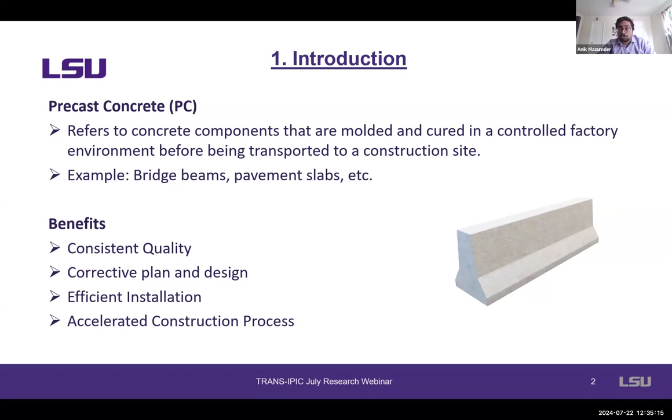They provide consistent quality since they are manufactured in a controlled environment, ensuring uniformity and high standards. Their efficient installation is ensured because precast components can quickly be assembled on site, reducing construction time and accelerating the construction process.

If we take a look at our work in phase one, we aimed to develop a hierarchical framework of significant factors representing the interdependencies or relationships of the precast concrete supply system using interpretive structural modeling. First, we identified the factors associated with cost, reliability, and sustainability. Then we explored the interdependencies among each element, and developed a hierarchical framework which helped us build this CCM, or curing cost minimization, model.

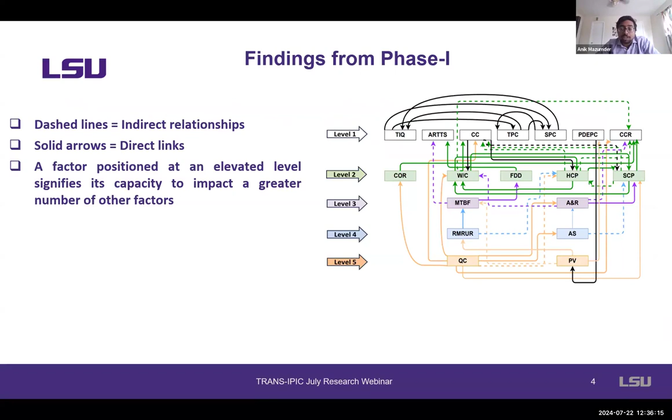This was the hierarchical framework representing the relationships among all the factors related to cost, reliability, and sustainability in the precast concrete manufacturing sector. The dashed lines indicate indirect relationships, while solid arrows indicate direct links between factors. A factor positioned at an elevated level signifies its capacity to impact a greater number of other factors.

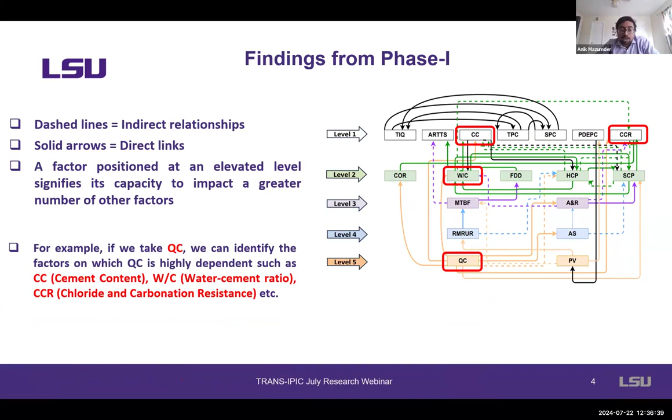For example, if we take QC, quality control, we can identify the factors on which QC is highly dependent, such as CC, cement content; WC, water cement ratio; and CCR, chloride and carbonation resistance, among other factors.

Now, if we talk about the motivation of our research work in this phase 2, we need to know the importance of efficient production of precast concrete.

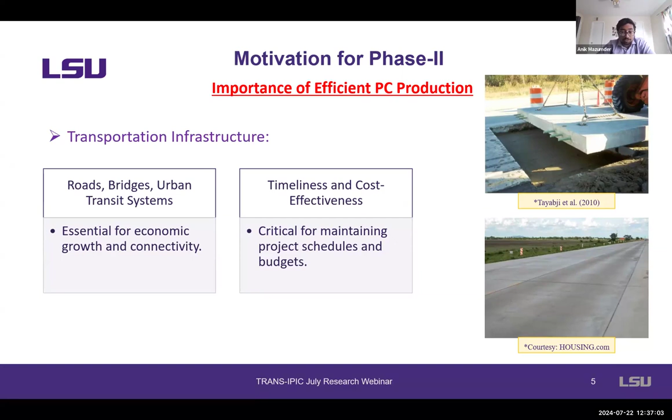If we talk about transportation infrastructure, it is essential for economic growth and connectivity, such as roads, bridges, and urban transit systems. It is also critical for maintaining project schedules and budgets. We can also face production challenges because mold setting and curing processes play a significant role in cost and efficiency, and can be highly energy consumable and create high labor costs.

Several studies have addressed various computational techniques that can address planning issues and aim to reduce the cost and project completion times.

According to Dawood, they proposed a heuristic approach for job scheduling. According to Chan and Hu, they developed a genetic algorithm for flow shop sequencing. According to Prata, they proposed an integer linear programming model aimed to schedule the production of beams and minimize empty spaces in the molds. According to Wang et al., they developed a heuristic approach to solve a suboptimal model to configure pallet layout during operations.

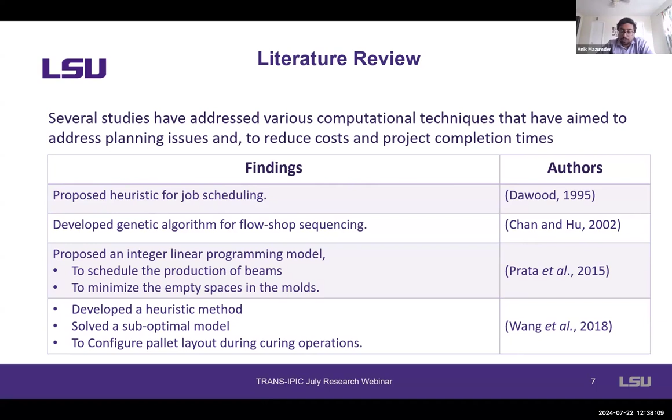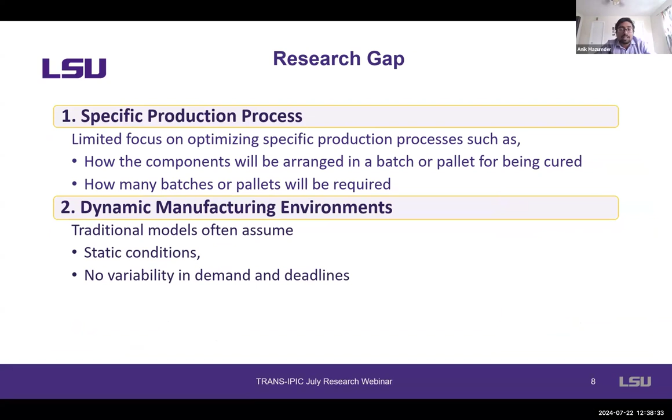So if we try to find the research gap, there is limited focus on specific optimization processes, such as how components will be arranged in a batch or pallet for curing, and how many batches or pallets will be required for the total curing process. Also, traditional models often assume static conditions, assuming there is no variability in demand and deadlines. So what is our existing problem?

In most cases, a single component is placed in a single batch or pallet during the curing chamber, which can cause a high number of batches or cycles to fulfill the total curing operations. This can also cause us to miss delivery deadlines and create extra penalties.

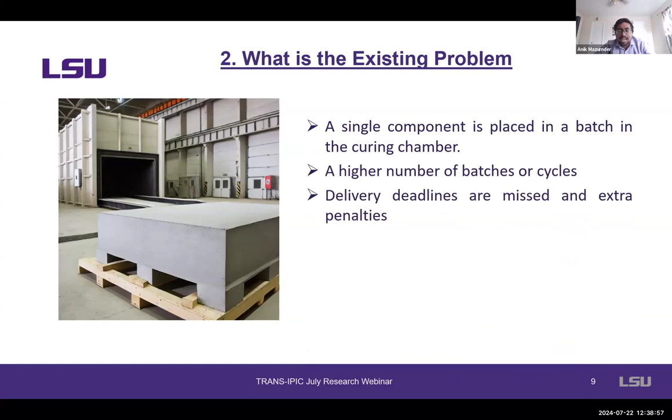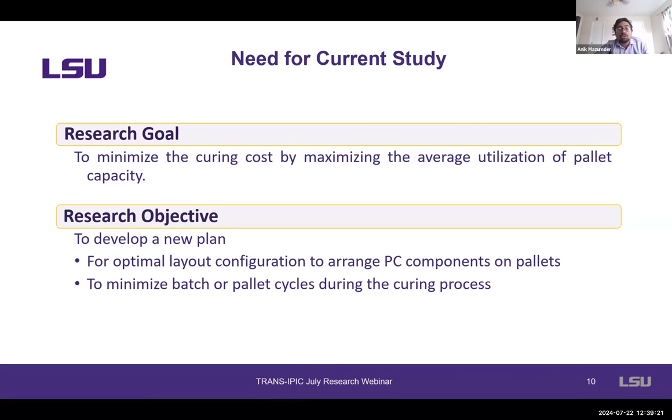So we need an optimal strategy for placement of curing materials or components. Our basic research goal will be to minimize the curing cost by maximizing the average utilization of pallet capacity. Our objective will be to develop a new plan for optimal layout configuration to arrange PC components on pallets, and also to minimize batch or pallet cycles required during the curing process.

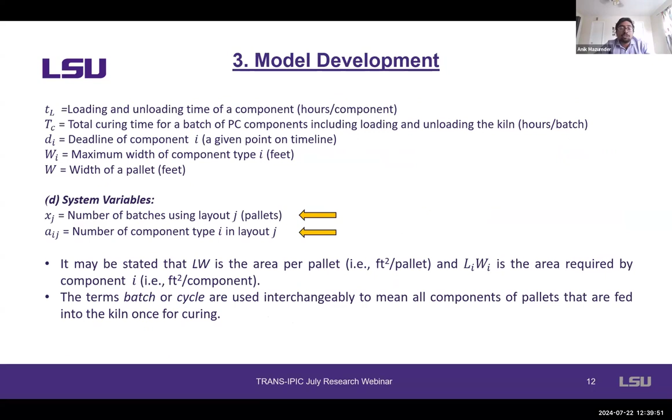For the formulation of the curing cost minimization, in short the CCM model, we will use these indices and system constants. Finally, we'll try to figure out the value of our system variables, or decision variables: xj, the number of batches using a specific layout, and aij, representing the number of components present in that layout configuration.

Using the previous slide's notations, we have developed the total energy cost. We will calculate the total energy cost for the PC components as presented in these equations, and after that we have multiplied that with the total batch numbers.

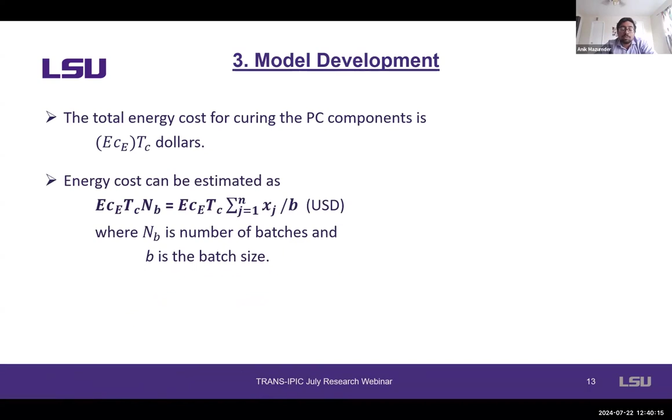We have also calculated the cost of loading and unloading components in all the pallets, and using that we have developed our first objective function in our CCM model using the system variables xj, the optimal number of pallets, and aij, a set of components per pallet, to minimize the cost of curing operations. So the objective function CCM in equation 1 represents the total associated cost of energy cost and

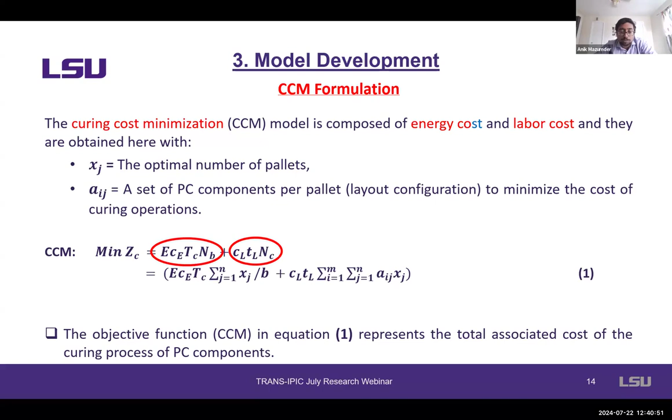labor cost per component, and this equation will be minimized to find the minimum curing cost.

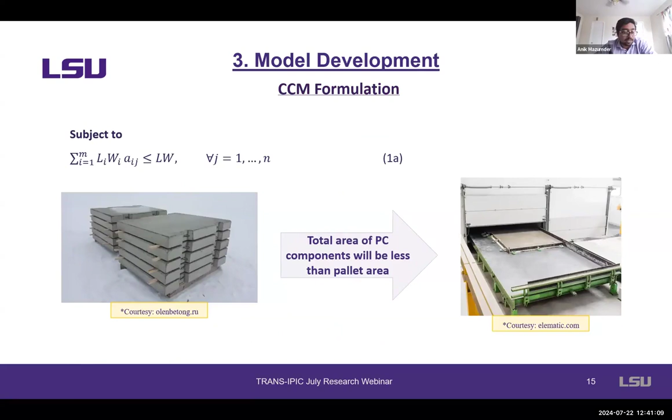This objective function was constrained using some equations. The first equation represents that the total area of precast concrete components will be less than the pallet area. The second constraint represents that the total number of required components of type I must meet the order agreement. The third constraint ensures that the production scheduling complies with the delivery deadlines of precast concrete components.

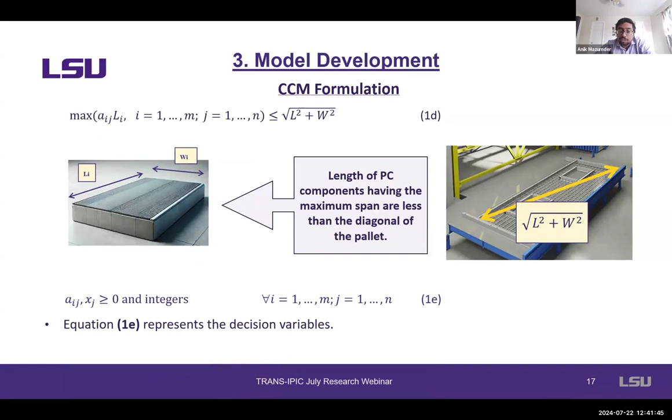The fourth constraint indicates that the length of precast concrete components having the maximum span is less than the diagonal of the pallet or batch present in the curing chamber. Finally, equation 1e represents the decision variables. That is the total package of our CCM model, having the objective function in 1 and other constraints from 1a to 1e.

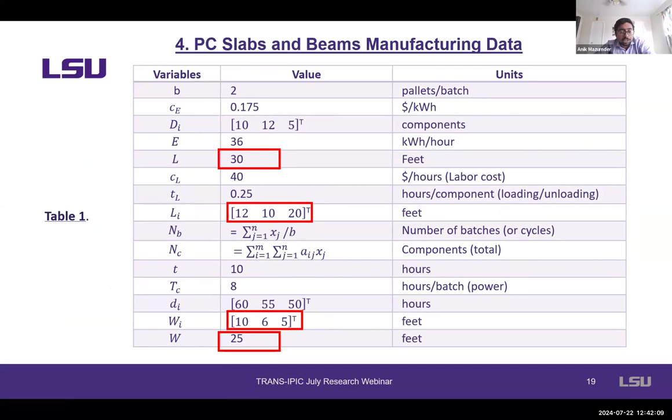After that, we took some example data to verify our model, using various data like the pallet dimensions and the precast concrete component dimensions to verify our CCM model. Using the data in Table 1, the CCM problem was numerically formed as follows.

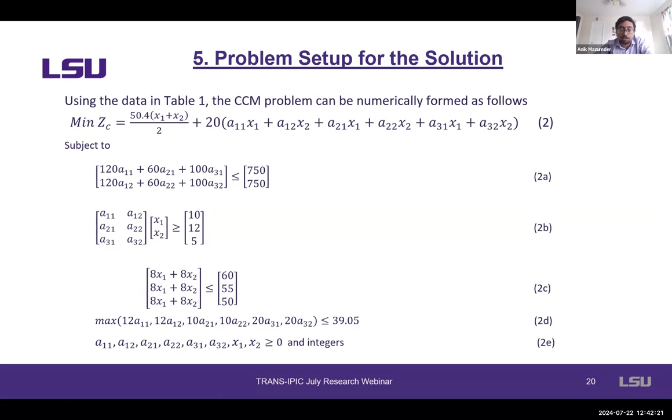Then we found the optimal number of pallets for two types of specific layout configurations. For the first layout configuration, we figured out the x1 value, which is 2. For the second type of layout configuration, we found the x2 value as 3.

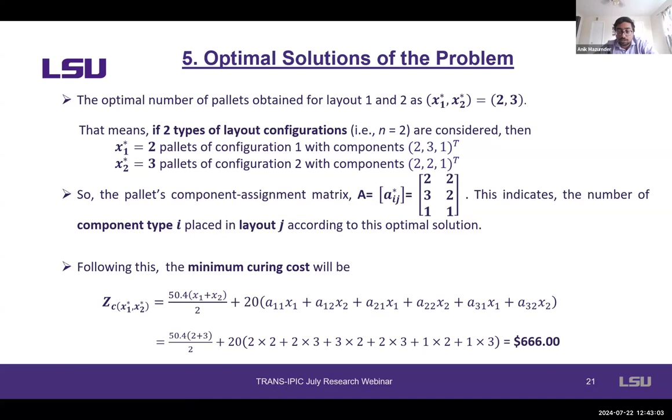So the pallets component assignment matrix A is equal to aij is 2, 3, 1 and 2, 2, 1. This indicates the number of each type of components placed in each type of layout configuration. Following this, we have determined the minimum curing cost, which will be $666 in a batch.

The computation input data and output results are provided in table 2, wherein only the changed values are provided in the input data column, and the rest of the parametric values are chosen from table 1. This table was built to analyze the computational performance of our CCM model.

From the research perspective, the computational performance results were analyzed and we found the following points: when the demand DI per precast concrete component increases, the curing cost also increases, as well as the computational time. When the length and width of the precast concrete components, meaning the dimensions, increase, the curing cost and CPU time also increase, but at a comparatively lower rate.

If more components are assigned on the pallet or batch, fewer pallets or batch cycles are needed, and so the batch sizes lead to lesser cost, according to the third row of our table 2 in our previous slide.

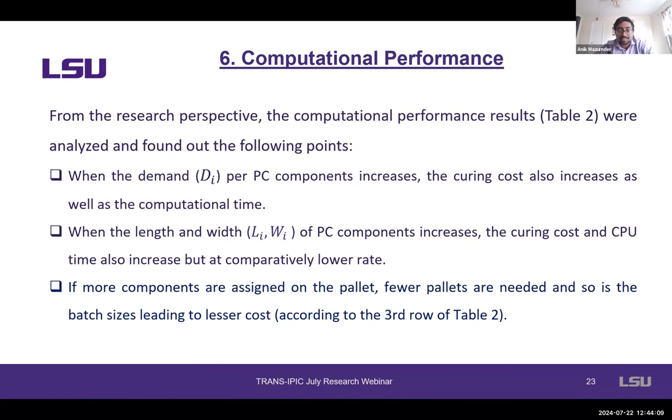In our future work, this mathematical model will be used to incorporate industry data in collaboration with Louisiana's Transportation Research Center. With increasing demand and dimensions of precast components, CPU time also gets increased. So a heuristic approach will also be followed to get the optimal layout configuration to reduce the curing cost. The model will be revised to focus on the most critical variables that can reduce curing cost.

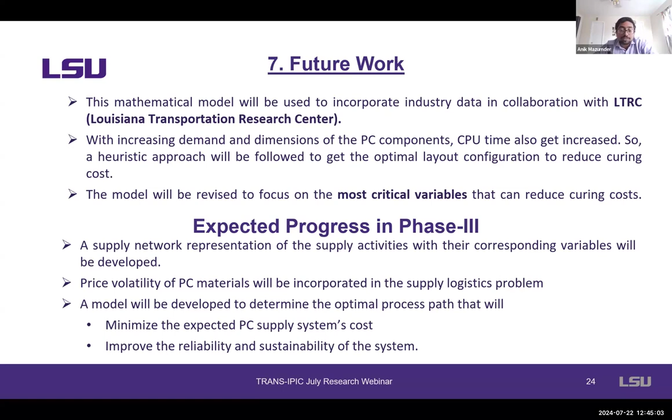As our expected progress in phase 3, a supply network representation of the supply activities with their corresponding variables will be developed. A price volatility of precast concrete materials will be incorporated in the supply logistics problem, and a model will be developed to determine the optimal process path that will minimize the expected precast concrete supply system's cost and improve the reliability and sustainability of the system.

As an application and scope, this optimization ensures that each component is evenly cured, which is vital for consistent material strength and structural integrity. The economic efficiency achieved through the model not only lowers the initial project cost, but also reduces the life cycle expenses associated with maintenance and repairs, supporting long-term sustainability.

These are our two working papers that we are working on. The first paper was to develop an interpretive structural modeling on factors, and that was the outcome of our quarterly progress report 1. Now we are working on optimizing the pallet capacity utilization to minimize the curing cost, based on the outcome of quarterly progress report 2.

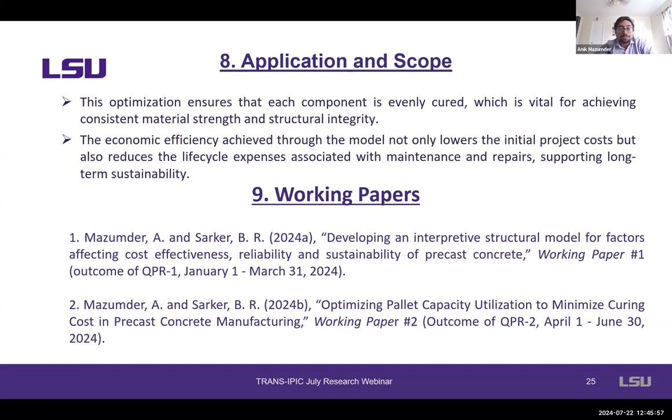Any question? I have a question. Okay, yeah.

Go ahead. So, Anik, thank you very much for very comprehensive, nicely presented work. My name is Jan Olek, I'm from Purdue University, and I got a question related to the statement that the curing cost increases with the demand. Could you elaborate a little bit more why that would be the case? Because from the concrete point of view, there's optimal curing conditions, and it should be independent of the demand, right?

I mean, there's not much you can do in order to accelerate if you're already accelerating. So maybe I'm missing something there. If you could elaborate, that would be good.

This statement? Yes. Okay, so basically this DI represents the demand for a specific type of component indicated at i. So when the demands will be higher, like if you're dealing with two types of precast concrete components, one could be slabs and one could be beams. When the demand of slab is 40 and the beam is 30, there will be a specific kind of curing cost. But when your demand is higher, instead of 40 if it's 60, then you will have to pay for the curing cost, because you have your pallet cycle, or you will need a higher number of batches to cure your concrete, because pallet size is constant.

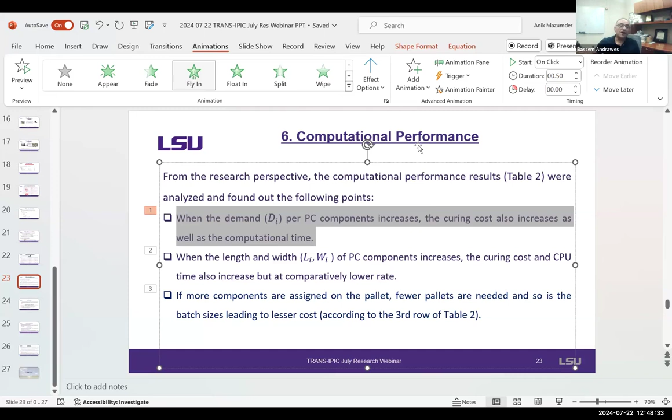I think I might have a question. Thank you, Anik, so much for the very nice presentation. You mentioned some dollar amounts, which brings the curiosity of someone from industry to ask where you obtained your main cost figures.

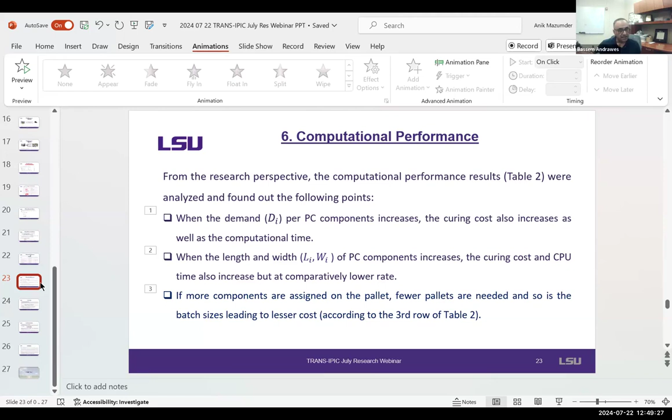You mentioned energy and labor as two main sources of cost. When we say energy, do we know if the energy consumed by different precasters for the same type of component is the same? Are you taking this variability into account? Another important thing is the mix itself - concrete is just one thing, but what goes into it and the curing process matters, since different precasters adapt different practices in curing. Can you elaborate on the variabilities and how they are included in your study?

Okay, let me get back to the slide. You're talking about these two types of equations, right? So in that equation, it's actually indicating the energy cost. Here, let me go back to the notations - E is calculated as the energy consumption rate per curing chamber, in kilowatts per hour, and CE is the unit cost of the energy.

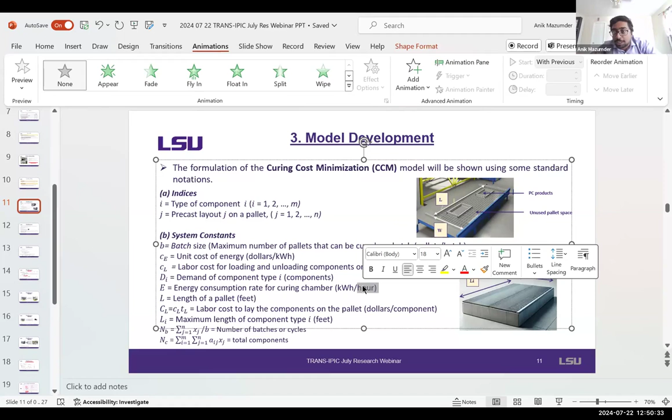You've pointed out a very good point, because every precaster can use their curing chamber differently - different energy rates and unit costs of energy will vary from place to place. That's based on how many hours you use the curing chamber for different types of precast concrete components. The same goes for labor cost, which is calculated per component - when placing components in pallets or batches in the curing chamber, the number can differ, so you pay a different value for each component.

In this case, Anik was basically measuring the power or energy consumed by the whole system, not by individual components, because the layout would be arranged differently. He took the combination, but the time span for all products remains the same, because the kiln chamber time is given on a batch basis, not an individual component basis. How much time and energy is consumed is measured per batch, not per component.

Am I clear? How would the material - the mix itself of the concrete, and for example the type of cement used and other factors - how does this play a role there, if any?

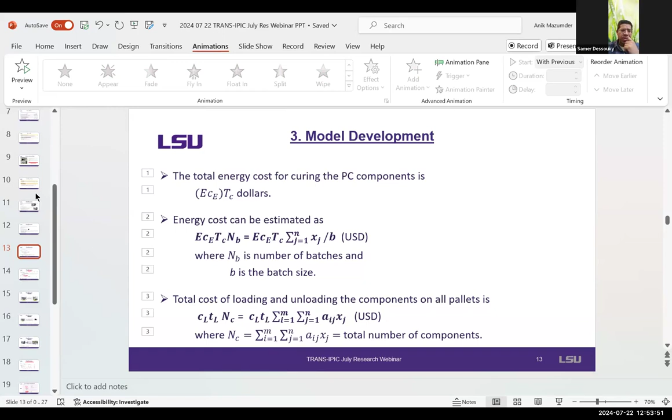Go ahead, any other question? Yeah, just a follow-up question - does the framework you presented have manufacturing data? Because every manufacturer is different - production rates, the type of frames, type of forms they use, the environment they have. So does your framework have manufacturing dependent data that I can account for?

This framework was developed based on expert opinions and existing literature, because it represents how each factor relates to another. For example, if you want to increase the quality of your concrete, quality itself is a vague term - it's dependent on other terms. So you have to look at what factors improve quality. If you look at quality, you have to look at your cement, concrete, or W/C ratio, or CCR, and so many other factors. So we've basically figured out these types of relations.

But yes, we will try to figure out some numerical values and assign these values with something, because there is an issue with reliability. We still don't know if we improve the W/C by 90%, what will be the quality improvement ratio. So we'll try to figure out this data from the industries, and then implement them in this framework. Thank you for that.

That was a very good point. Thank you, Samer, I think your point will be more elaborated. This data does not represent any particular company - it is just representative data, but it will vary from company to company, from film design or chamber design perspective. So we cannot say this is generalized data for all chambers. I understand, but at least the model has a piece that can account for variabilities between manufacturers. Yes, that's the important part. Thank you.

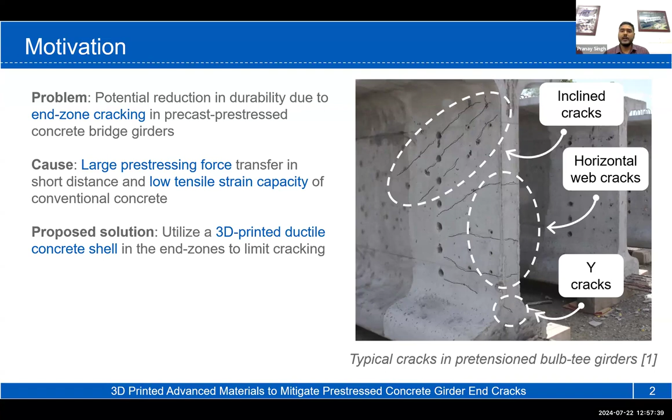So the cracks that are exposed to the environment - we are trying to reduce the width of those cracks at the end zones. Considering our problem statement, our objectives are to investigate the SHCC shells and how they can be implemented to solve this problem, to develop a 3D printable strain hardening cementitious composite mix and a printing system for material level testing, and to look into the composite behavior of the SHCC and conventional concrete, how they behave when cast or formed together.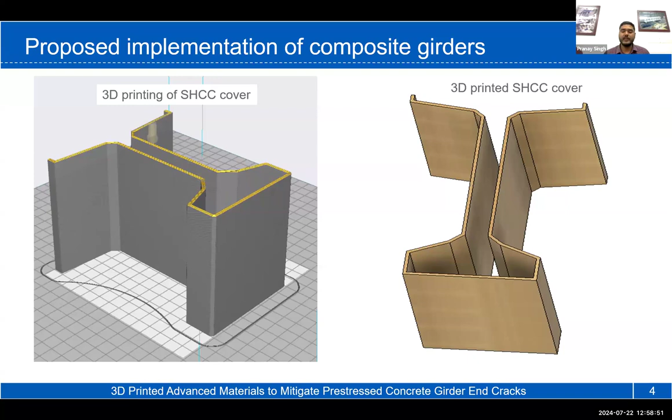As the technology matures, it could have many different use cases and implementations, but at this stage we're considering one simple method with two different stages. The first stage involves 3D printing of these covers - a 3D printed SHCC cover will be made either at the precaster's facility or at a 3D printing laboratory. Once printed, it will be cured and given time to gain strength. When ready, it will be transported to the precaster's facility, where they have a pre-stressing bed and usual formworks used to create these precast girders.

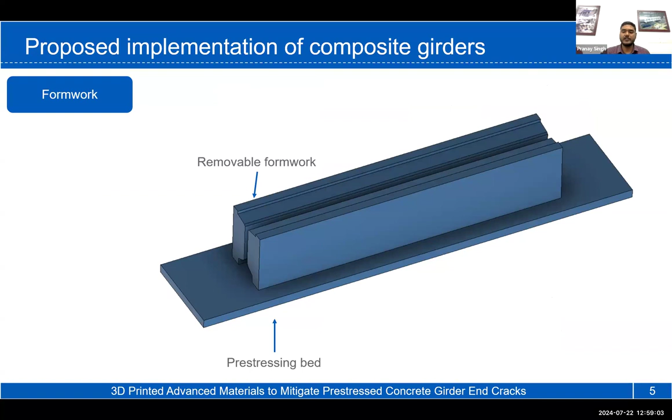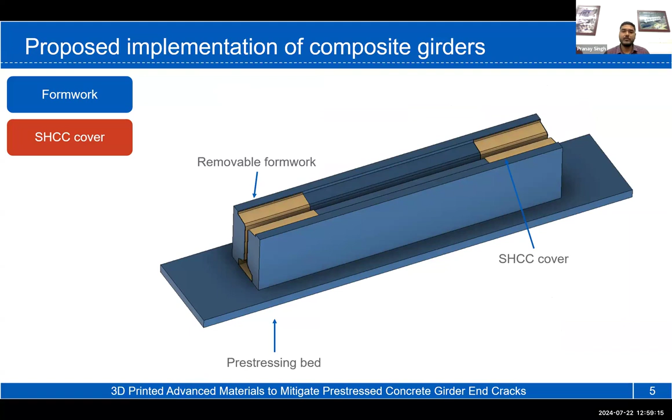One feature of these 3D printed cells is that their thickness will be limited to the cover zone thickness of these girders, so it fits inside the formwork without modification. Then, as usual, non-pre-stressed reinforcement can be placed, pre-stressing strands applied along with the pre-stressing, and then concrete poured. Once it attains strength, the pre-stress can be released and formworks removed. What we get is a composite bridge girder with SHCC covers at the ends. This is one of the proposed implementation methodologies we are exploring.

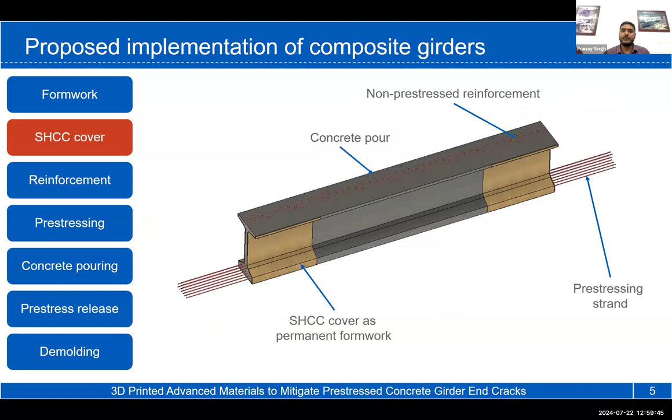Coming to the strain hardening cementitious composite - the material we're proposing for the application is a kind of fiber reinforced concrete, optimized to have distributed cracking instead of larger cracks. The constituents are basically the same as any fiber reinforced concrete, with two key ingredients: viscosity modifying admixture and high range water reducing admixture. The ratio and amount of these ingredients will be calibrated to achieve 3D printability in strain hardening cementitious composites.

So coming to the requirements for the mix that we are trying to develop, it will basically have two different sets of requirements. The first one will be the rheological requirement to make it possible to 3D print this kind of concrete, and the second one will be the mechanical requirement to actually fulfill the objectives that we have with these kind of cells.

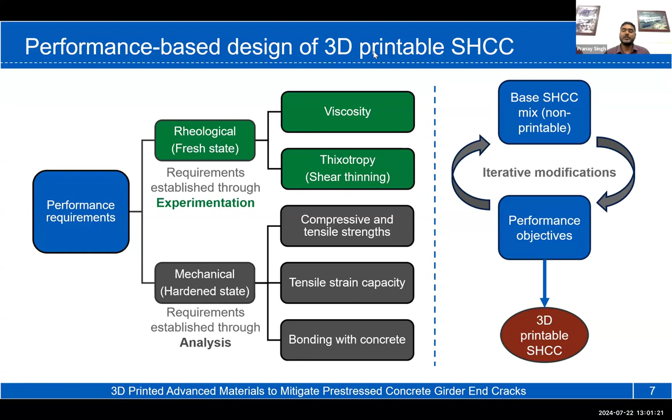So the mechanical properties, one of the crucial ones is the tensile strain capacity for a strain hardening cementitious composite. How we are trying to achieve both these objectives is through iterative modification. We started with a base strain hardening cementitious composite mix that is of course non-printable. It was developed earlier in our lab, and it has that strain hardening behavior. We are modifying its ingredients and changing the proportion in a way that the strain hardening behavior is retained, and it additionally achieves that rheological behavior to make it possible to 3D print.

For understanding the hardened property objectives that we will need, particularly the strain hardening capacity of these materials from these kinds of mixes, we developed a numerical model. This is a 3-dimensional nonlinear finite element model, and we actually modeled a girder which was experimentally tested at University of Texas, and they got very wide cracks.

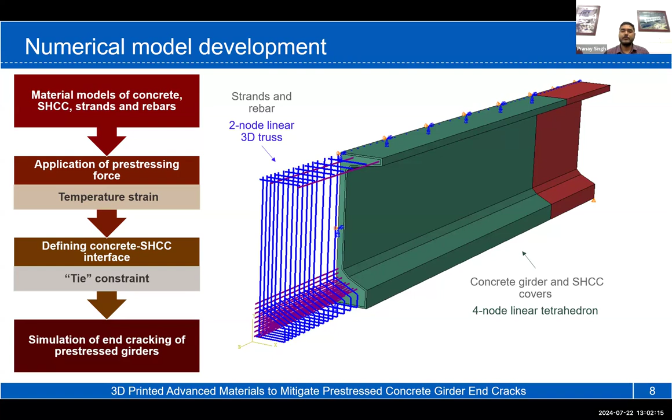They had significant cracks at the end, and that's why it represents one of the worst cases of end zone cracking. So we modeled the same girder with the conventional concrete, and then modified it with SHCC at the ends.

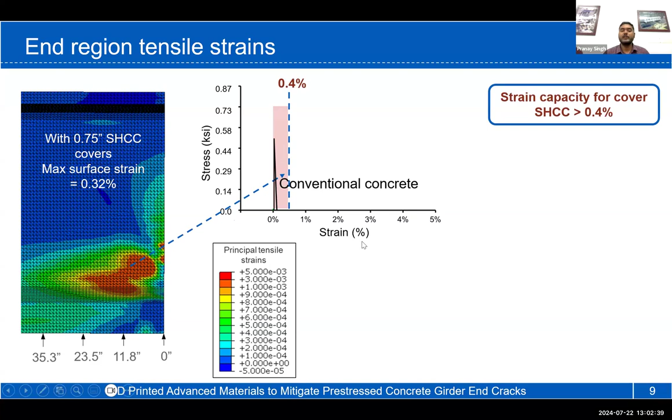When we did the numerical simulation, we obtained that the maximum strain reached on the cover surface is somewhere at 0.32%. This marks the limit for the strain capacity that we will want to have with our covers. As we can see in the stress strain plot, a conventional concrete will actually get significant cracks at this strain level. However, the strain hardening cementitious composites have the ability to sustain this kind of strain, and the average crack width, even at this strain level, will be somewhere less than 0.1 millimeter.

The rheological requirements were established through a series of experimental investigations, and we observed that for strain hardening cementitious composites, they have different rheological requirements which are contrasting from each other for each stage of processing. We start with the mixing, and at that stage, fiber dispersion is crucial for achieving the strain hardening behavior. Then at pumping through our extruder and pumping through the tube, it has a different rheological requirement. And later on, for extrusion and buildability, we have some different viscosity and rheological requirements.

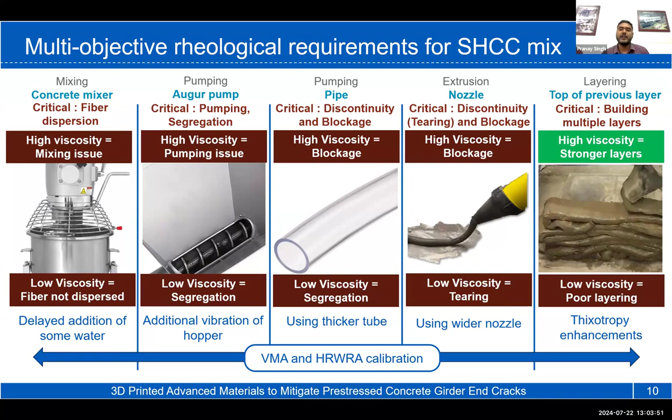So how we achieved it was through calibrating the two ingredients, VMA and HRWRA, and later adding some more ingredients that I will discuss in upcoming slides. So the first stage was viscosity modification. From the base mix, we created 16 different mixes with different VMA to HRWRA content.

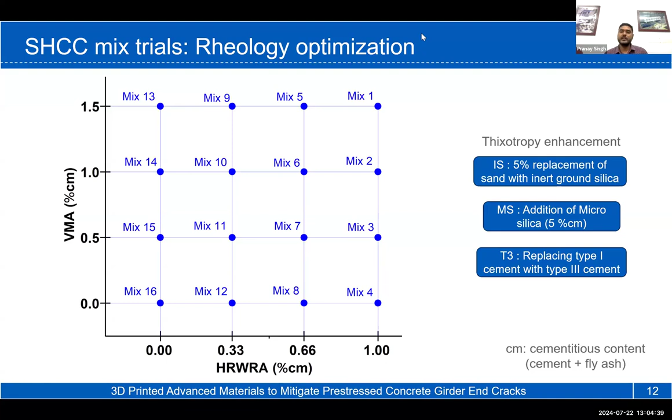Out of these 16 mixes, we tested them, and we disqualified the mixes that were not showing printability, or had water segregation or poor fiber dispersion. We have discussed it in detail in our previous April workshop, and I will not spend much time on that. Once we filtered out the mixes that were not printable out of these 16 mixes, the selected mixes were further optimized for their thixotropic enhancement by addition of ingredients like ground silica, microsilica, and type 3 cement.

So eventually, after this rheological optimization, we obtained 3 mixes that were printable, and they had fibers in them. They started from our base SHCC mix.

So now we tested these 3 selected mixes for their hardened properties. The mixes were mix 9 with inert silica, mix 9 with microsilica, and mix 10 without any additional ingredients. We tested it at 28 days of ambient curing.

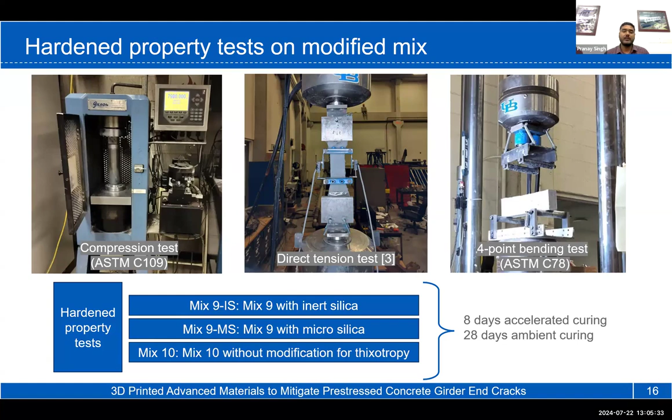So these are the results. I would like to discuss the accelerated curing as well. Accelerated curing is actually an elevated temperature curing, where we elevate the temperature for about 5 days, and for the rest of the time it is in ambient curing. So it takes a total of 8 days.

It is still in study, and we have not completely tested all the properties and compared that it is good, but we are working on that aspect as well.

The compressive strength result shows that for all of the mixes we are trying, we are getting a compressive strength in the range of around 7 to 8 KSI, and our initial target was 6 KSI for all these mixes. So we are getting the desirable compressive strength for all 3 mixes.

The tensile strength of these mixes is somewhere in the range of 0.7 to 0.9 KSI. And the tensile strain capacity was higher than the limit of 0.4%. So we are getting somewhere in the range of 0.6 to 0.9% on average.

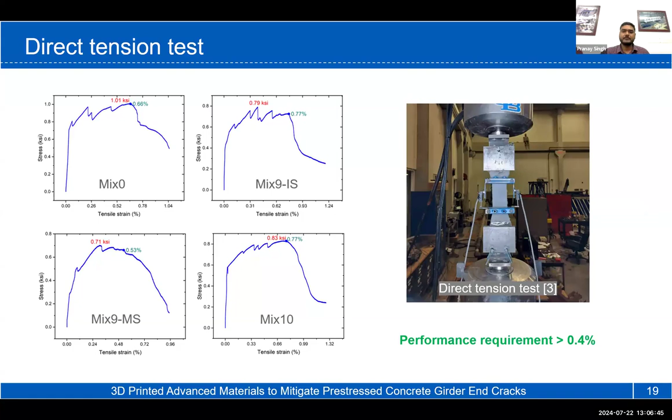We have done a 4-point bend test, and the modulus of rupture from that 4-point bend test is in the range of 1.5 KSI for all 3 mixes.

In summary, if we conclude the hardened property testing and the flow criteria that we wanted to fulfill from the mix, all 3 mixes have an average flowability factor calculated from the drop table test we discussed in the previous workshop. It was in the range of 1.2 to 1.5, and that limit is actually what we found to be suitable for 3D printing purposes.

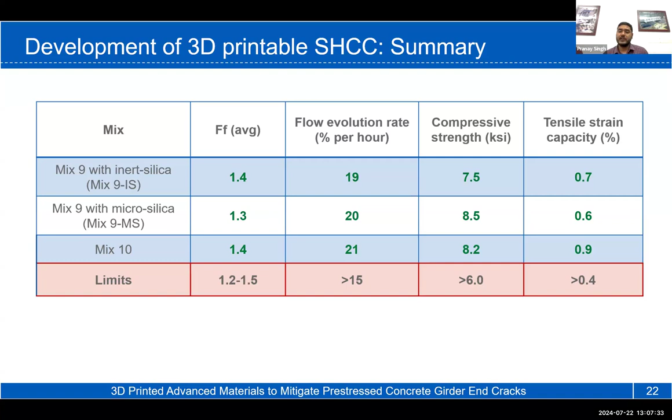The flow evolution rate should be greater than 15%, and our mixes fulfilled that criteria as well. The compressive strength criteria and tensile strength criteria are also fulfilled from all 3 mixes.

Next, I would like to discuss the development of the 3D concrete printer at UB. 3D concrete printing has an aspect of machine material interaction, so the behavior of the material depends on the type of equipment and the setup we have. For that reason, we have developed our own concrete extrusion system, control system, and a computer numerically controlled frame.

This computer numerically controlled frame is actually a pre-built frame for printing plastic, but we have modified it to work with concrete. The control system we are using is an Octopus board with Marlin firmware.

We input the G-code files for the 3D model through Pronterface, which is an open source software. Our control board controls the nozzle X, Y, and Z coordinates, and it has the capability to control the feed rate from the concrete extruder.

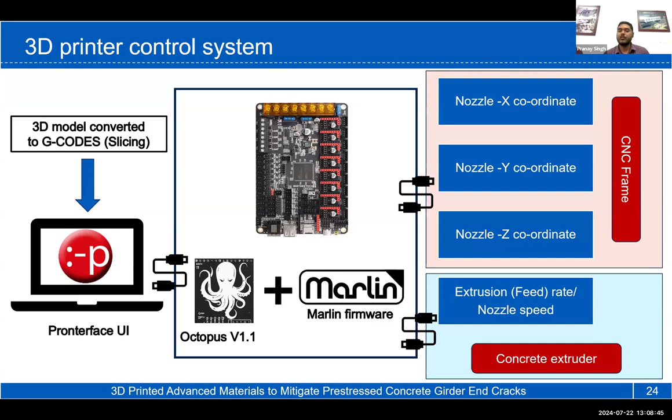We have not yet done that. We are working with a constant feed rate pump, but later on we would include these capabilities as well.

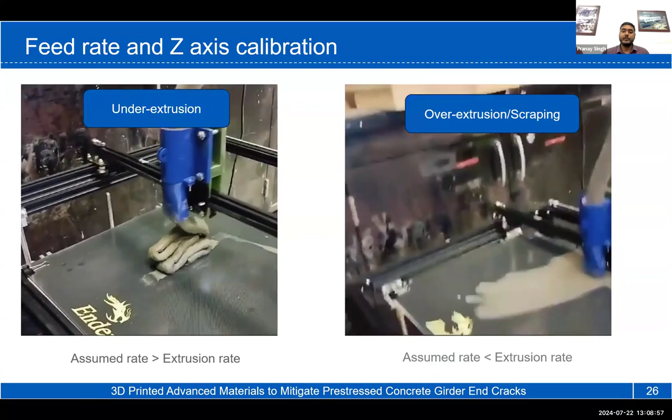One of the findings from the initial 3D printing trial is that the mix we developed requires some initial calibration for the feed rate, that is the speed of the nozzle and the motion of the Z direction. What you see here on the left is under-extrusion, where we assumed our extrusion rate to be higher than the actual extrusion rate. On the right, you can see over-extrusion, where our assumed rate is less than the extrusion rate, causing some kind of scraping.

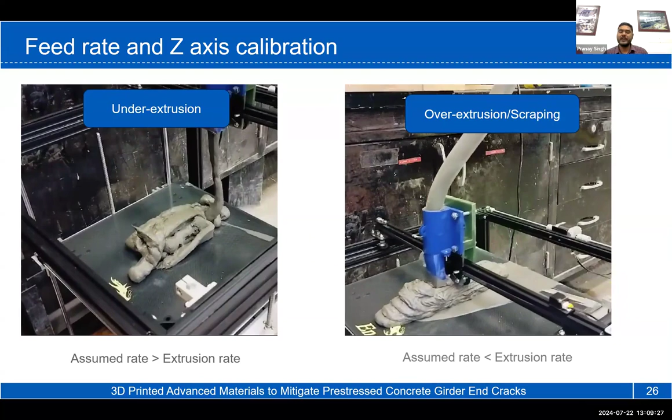Once we optimize this for a particular mix, what we get is this kind of 3D printing, which is good in itself.

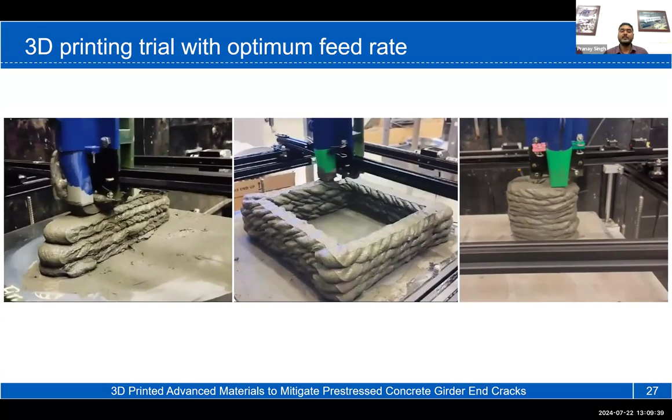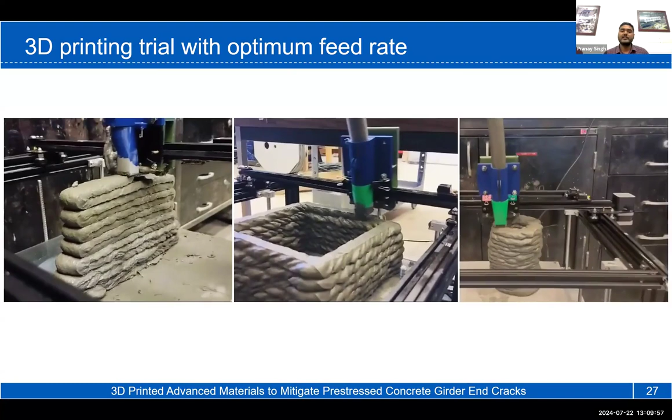Here you can see that our focus is on printing the cellular structures with either 1 or 2 filament thickness. Although we can print solid parts as well, since our study is based on printing of the cellular structures or cells, our focus is on printing these cells and testing their properties.

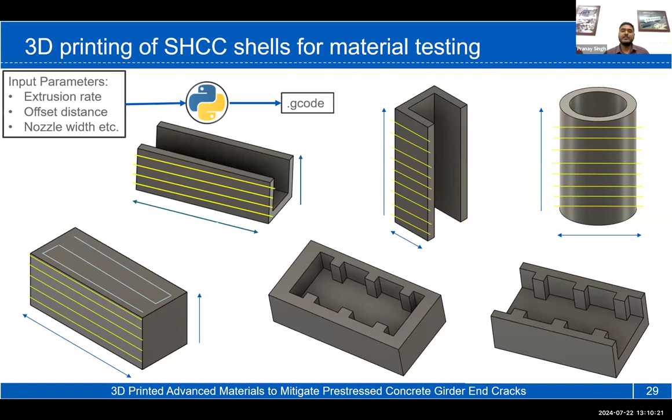What we're currently working on is printing different kinds of cells and looking at the 3D printing as well as their hardened properties. We are also looking at printing some complexes like grouped cells to improve the behavior or the bonding between the concrete and these cells. This all constitutes our future scope of work, but this is the direction in which we are moving for 3D printing.

In summary, we established the performance requirement in terms of tensile strain capacity for our strain hardening cementitious composites, and it was found to be greater than 0.4%. We did some experimental investigation to come up with rheological requirements using the drop table test, and we obtained the flowability factor suitable to be around 1.2 to 1.5, and flow reduction to be greater than 15% per hour.

We performed hardened property tests as well and found that the mixes were complying with the requirements. We further developed a 3D concrete printer with an extrusion system, CNC frame, and a control system.

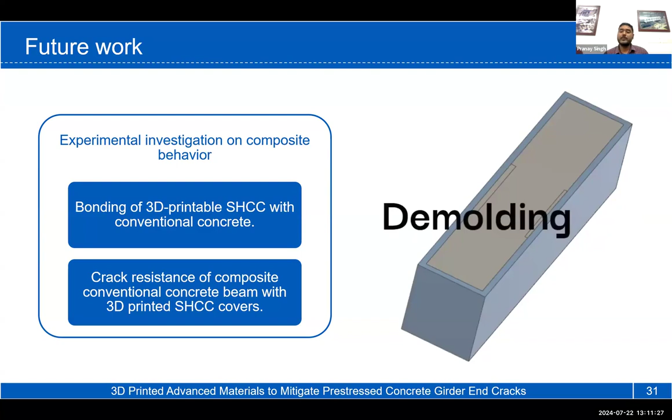For future work, we are trying to investigate the bonding of the 3D printable SHCC with conventional concrete and crack resistance of the composite conventional concrete beam with a 3D printed SHCC cover. So what we are trying to do is test this idea of using SHCC, 3D printed SHCC, as a permanent formwork in a beam.

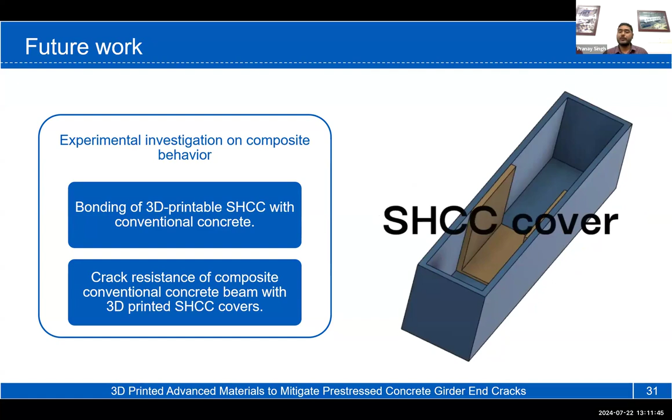So what we will do is take a usual formwork and put SHCC inside it, put the reinforcement, and then create some kind of composite beam to test the hypothesis that we wanted to propose later on for a real full-scale girder.

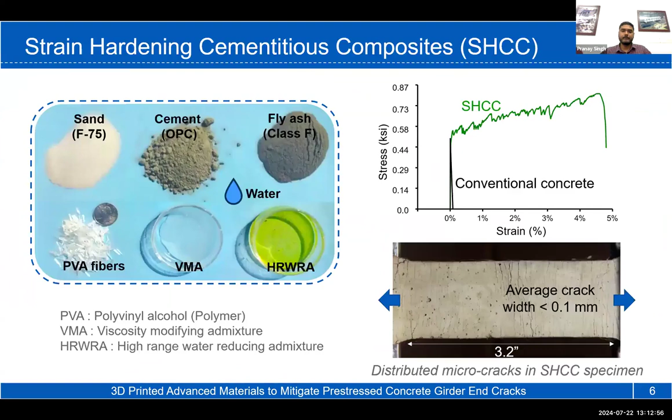Any questions for Pranay? Yeah, I can start with a question.

Great work, Pranay. This is the second time I've listened to this presentation, and it brings up a question. You are introducing a shell made from 3D printing concrete at the girder ends to prevent or brace that portion from the cracks that propagate from the huge transfer loads from the girder to the columns. Correct? So you are bracing that side of the girder, correct? Yes.

Should this problem be solved through revising the concrete mix design to account for these additional stresses across the whole girder, or should it be addressed by expanding the size of the end girders to a larger size? So instead of adding braces, maybe try to resolve it through a stronger mix design, a better cement for the concrete, or expanding the size structurally. So material or structurally - would that also be an option that can be considered?

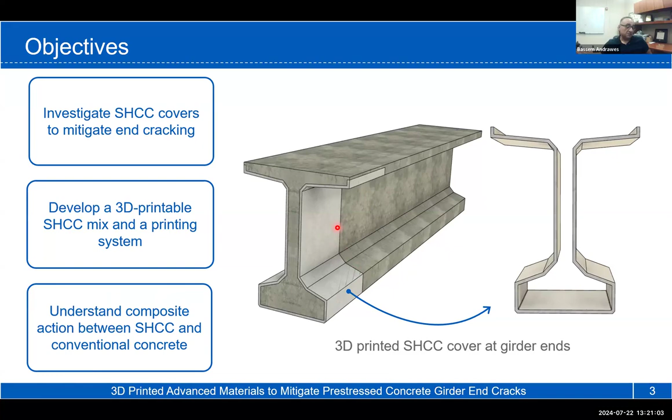What I meant specifically is that the interface when your end region ends, and now you start actually placing your normal concrete, not the interface between the concrete and the 3D-printed concrete at the end region, but the interface between the end region and the non-end region phase. That's going to be the critical part, the line shown in your section. So that's something that maybe needs attention. That's an interesting thing. I don't know how you can handle a problem like that, with reinforcement, with what type of material, transitioning from non-printed to printed.

That's an exciting thing. Yeah, so when we conduct a 4-point bend test with this reinforced beam, we will get answers to some of these problems that may arise. Sure, looking forward to that. Thank you.

I have a few minutes. If there are any more questions, I can entertain them. I think we don't have anybody.

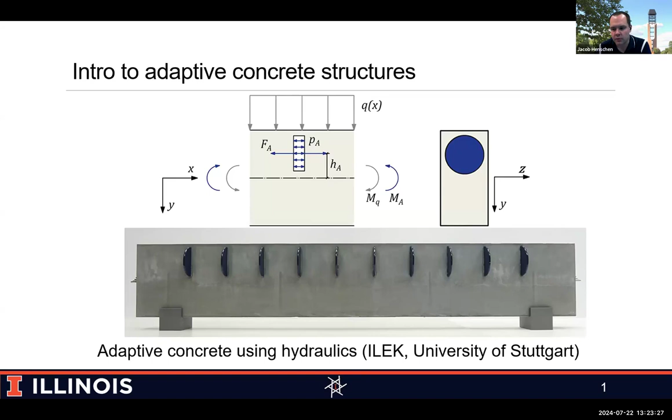developing something for a bridge girder or something that has to be maintained longer term. So as we started to think about this challenge, we wanted to work through the problem. If we have a beam, whether it's pre-stressed or not, any type of precast beam, once we remove the pre-stressing, remove the formwork, etc., that just sets our camber, that sets our geometry. This is limiting when we talk about things like creep in our pre-stressed beams, what happens when loads begin to change, all these other challenges that may arise during the life of a structure. We aren't really able to adapt concrete to that very well.

So borrowing from this idea with the active hydraulic actuators, what if we think about using some type of anchor? There are a lot of expansive concrete anchor systems out there that will generate these internal compressive forces in that top layer that can actually start to adjust our camber.

These anchors could be something where they are load activated. So you think about a load passing over a bridge, all of a sudden the bridge is actively cambering itself, or it's something that would be some type of post-installed system. But basically what we're getting at is we will have our beam deflect, and then we can use some type of system to cancel out the deflections.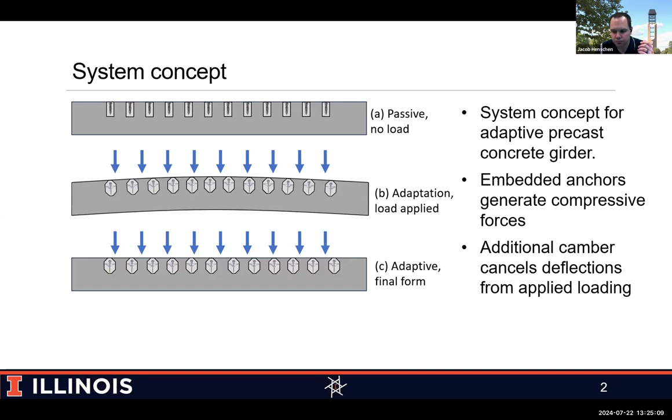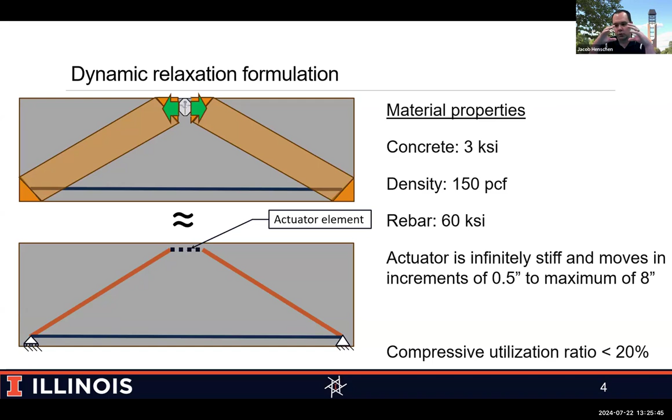Previously, we've presented on the modeling that goes into this, which follows this dynamic relaxation formulation. Starting with the strut and tie model, this is a static analysis where we solve for nodal displacements, element forces, all the usuals. But instead of just having that system that doesn't move, we add in this actuator element that has infinite stiffness, and then it's also able to move and change the geometry.

With this algorithm, it's been around for quite a while, but we've added this folding and bending energy element where at the nodes, instead of having free rotation, there are rotational springs to add some stiffness as we get rotation through our structure. So with the modeling in place, we set out to work on what systems could actually generate this mechanical expansion along the top that would impact camber.

We started with just typical concrete anchors. These are steel sleeves around a bolt with a wedge on the end of it, so as you tighten it, that sleeve expands and bears into the surrounding concrete. They can take a couple different forms. On the left, it expands at the bottom. The ones on the right expand through the center.

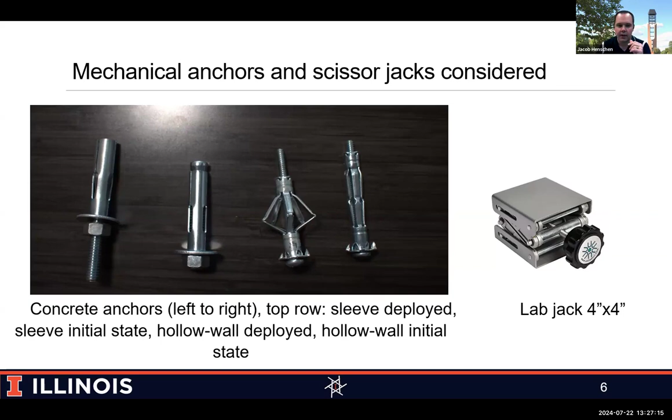We also thought, well, let's maybe work on a more idealized system too. So we actually just employed a lab jack where we can control exactly the displacement at the top.

It's actually pretty challenging to measure what the force is in these different anchoring systems. With the lab jack, I'll talk about how we calibrated that in a few slides. But with a lot of those anchors, we had to get creative. So we were working with some scales and some jigs to understand, as you start to actuate these anchors, what is that expansive force?

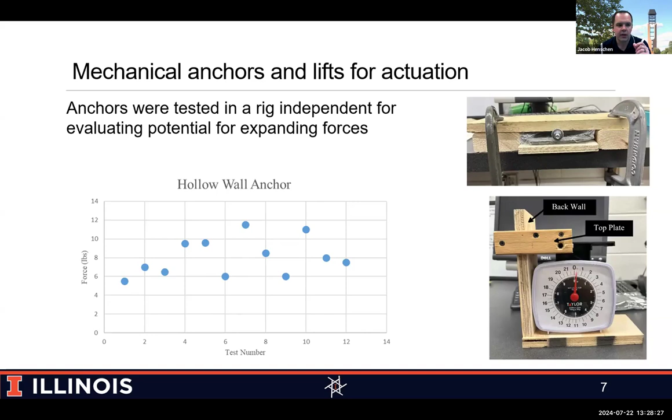There's a lot of elasticity built into the system as you tighten it, so it's a little difficult to get a reliable correlation between how much you tighten the anchor and the force it's exerting on the material around it. So we started with the lab and these jigs, and we quickly realized we needed to move on to just concrete.

With concrete, we use what I've always called my typical concrete formulation, with a 0.42 water cement ratio, so it gets us around 4,000 psi. Just using standard lab sands and 3/4 inch nominal maximum size limestone coarse aggregate, a very standard mixture. This is what Illinois DOT uses for a lot of their pavements and things like that. The only thing we pulled out was the air entrainment.

Now, with that in mind, I did come back and add some fiber reinforcement, because as we're starting to create these internal stresses, I didn't want there to just be a crack and all of a sudden we lose the specimen immediately. I just wanted it to be a little easier to work with. So there was roughly 1 pound per cubic yard of polypropylene fibers added to the mixture, a very low dosage, only meant to hold things together.

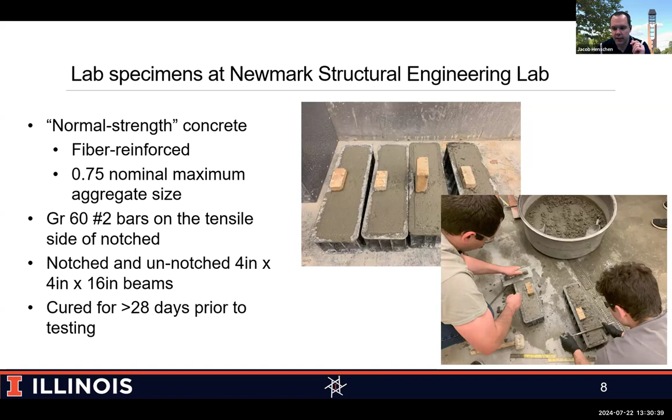Some of the specimens we did play around with adding some reinforcement to, really small bars, once again more for crack control than anything else. The beams we cast to test are 4-inch by 4-inch by 16 inches, so not quite the standard modulus of rupture beams. We wanted something smaller, so when we start to add these anchoring systems, we would hopefully see their effects a little more readily if we don't have such large specimens. Then just standard curing for 28 days to get to that 4,000 psi mark.

With the specimens, you can see that we created some with notches, which was basically a blank we would insert into the molds during the casting process that was then later removed. The specimens, after casting, we used surface mounted strain gauges with them.

I've done this numerous times where you apply a thin layer of epoxy. That's why the surface looks wet there. Then we apply our strain gauge on top of the epoxy. The epoxy gives us a nice flat, consistent surface to bond our gauge to. And then we can also use just the standard cyanoacrylate cement to fix the gauge.

For the most part, we use the larger gauges. These are our 30 millimeter gauge length strain gauges from TML. The longer length really helps with getting more of an average strain reading over that distance, especially since we were using standard large coarse aggregate. If we get a coarse aggregate near the surface, then we don't get some weird readings. Although we did use some basically 1/4-inch strain gauges, which are more of what you would expect to be a standard strain gauge. We use those in addition to the longer gauges, just to help provide a little bit more confidence in our measurements.

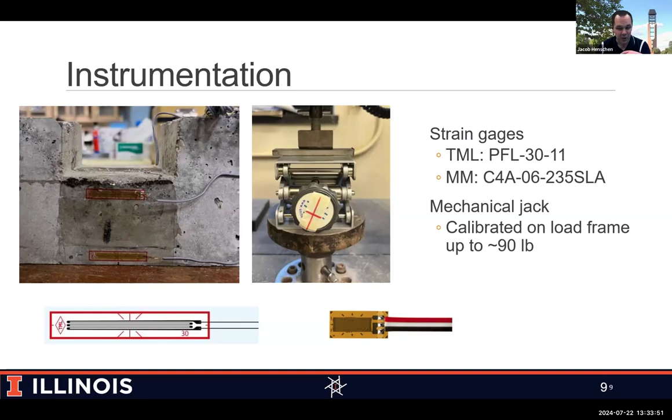We set the height to that opening within our concrete beam, and then built our own custom calibration curve with the position of our turning screw and the corresponding applied load. We were able to get several measurement points that we had good confidence between applying 0 load all the way up to about 90 pounds. Starting from the theoretical, I said we can go up to about 90 pounds. Well, this lab jack was only actually rated up to about 22 pounds for general lab usage.

So we were actually taking it well beyond its recommended limits. So doing some calculations, what does that 22 pounds get us? Well, it gets us about 2 microstrain right at the top surface of the beam. This 2 microstrain actually works out to basically give us plenty of camber to cancel out any deflections due to self-weight. Obviously, if we start to apply loads, then we'll have to apply a lot more load to account for that. But at least with the self-weight, we found that 22 pounds could more than take care of it. So we applied strain gauges right at that top surface where we would expect to see about 2 microstrain.

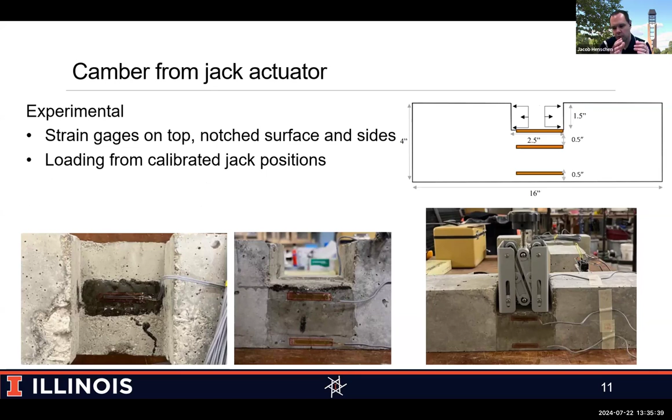We also applied gauges on the 2 sides to get the top and bottom, where you would hope that maybe these are going to be equal and opposite. So then what does the experiment look like? Using that jack, we were able to apply the load basically up and down, and we did that several times within that calibrated spot between 0 and 90 pounds.

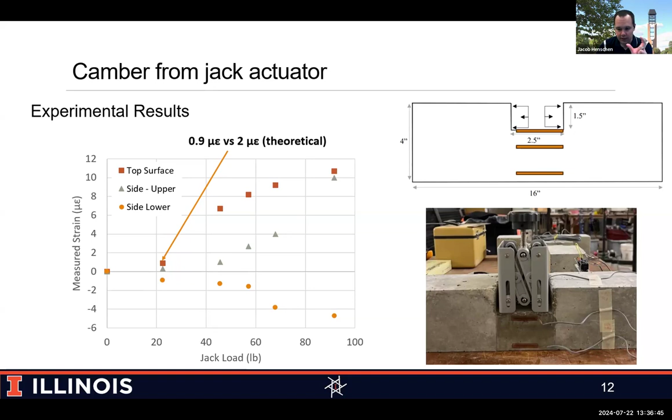So that showed us we're picking up and seeing what we expect at these lower loads in a controlled setting with this lab jack. And so then let's go to our anchors, where again, it's really difficult to actually back out what is that expansive force as you tighten the anchor.

We used 2 different types of anchor, or 2 different sizes of anchors. They really are the same type—these wedge shaped anchors that, in the middle there, that picture kind of shows you the force they're exerting on the surrounding concrete. For this, we started with just a gauge on the top and the bottom, where that top gauge was going to be right where that bell flaring would be for our anchors. With the smaller anchors, we could pretty easily get them in a line of about 3 across the surface. Remember, this is a 4-inch wide member, so getting 3 in there is probably about the limit—we really started to see problems if we tried to get a 4th one in there. So we limited it to 3 with the 1/4-inch anchors and 2 with the 3/8-inch anchors.

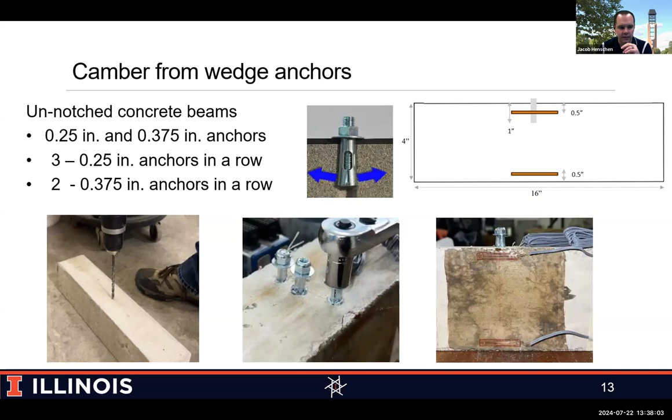So then we went ahead and started to apply our loads. Again, now we're not working on the notch beam. We're working on one that is just a regular prism.

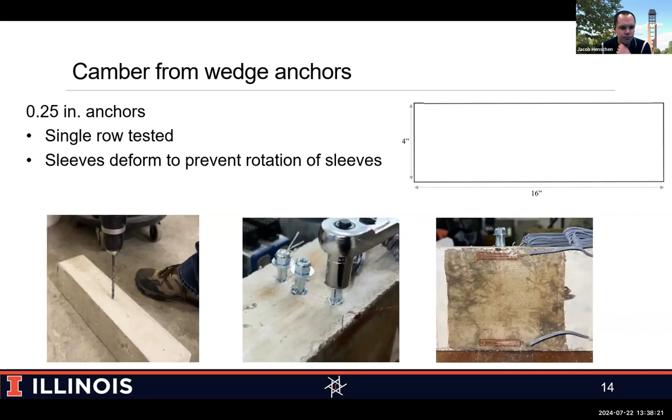And this is what the results showed for the 1/4-inch anchors. With these 1/4-inch anchors, they are built to be lower load, and so we saw that they don't generate nearly as much stress that we maybe need to see.

Now, with these smaller anchors, we also noted that the sleeves had more deformation when we were applying the load. So that really pushed us to think, okay, we should go ahead and take a look at the larger anchors, because the metal was several hundredths thicker. So we were hoping that we would be able to generate more stress, even though we were only using 2 anchors as opposed to 3.

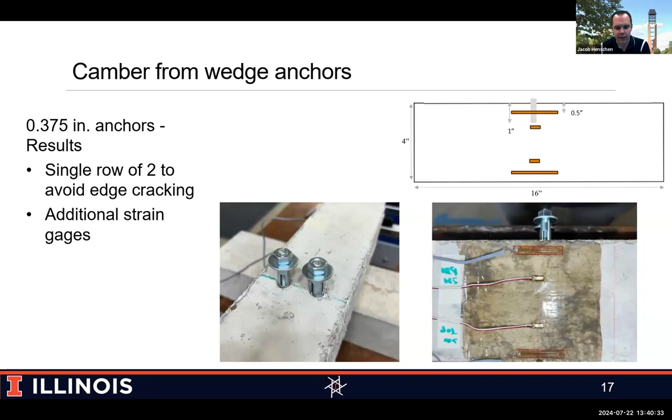So we did this single row of 2 anchors, and then we also started to add strain gauges to see, okay, can we actually prove that plane sections remain plane? What's the behavior like? And for the most part, things looked pretty good from the data. We're still working on this, still kind of calibrating some things.

With this particular specimen, I think with all the anchors, we embedded them 1 inch below the surface, with the top strain gauge being at 1/2 inch. Again, trying to get that strain gauge to be kind of right where we would expect that maximum amount of expansion from our anchors. Well, I think we probably went too low with the anchors, or we need to move that upper strain gauge down.

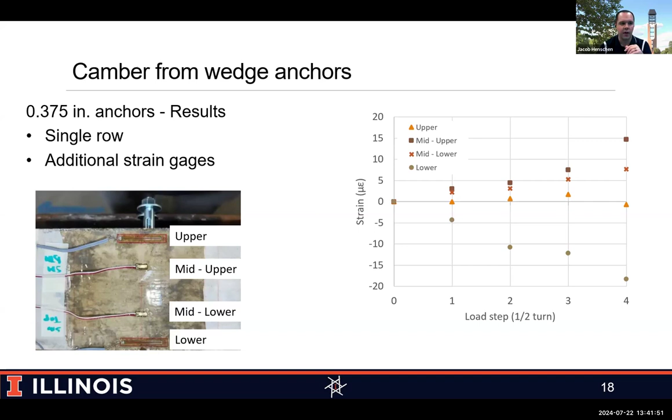As you can see from the orange triangles there, it kind of just hovers around 0 strain, where the others actually are taking off. Now, what is kind of interesting is, well, that middle lower gauge actually is experiencing tension all the way through. So we're not in a nice linear elastic region, but this warrants a little bit more investigation.

So far, we've really kind of done a lot of work with understanding, okay, how do these anchors work? What types of stresses, strains can we generate from them? We've begun to correlate the results with the lab stage or jack that we have been using. And we've found that, okay, so two of the larger anchors, 3 of the smaller anchors, we're seeing about the same or even more stress generated than what we could with that stage, which is exactly what we want.

We want to be able to go to these anchors and use the anchors, so then we can start to apply them over a larger surface of the beam. So we're going to continue to look at, maybe try some even larger anchors, start to look at additional anchors. So far all we've been looking at is a single row with measuring the strain right under it. Let's start to look at more rows, so we can actually see how much additional stress we can generate from those anchors.

And then we'll also start to measure and correlate those camber measurements. We haven't been measuring camber because we just want to try to understand the stresses that are being generated first. We'll come back and get the camber measurements later. And then finally, we are ready to start working on larger concrete sections. So as I said, we're on these 4x4 by 16 beams. Well, it's very easy to go up to the 6x6 by 20 MOR beams, and then we'll continue to get larger from there.

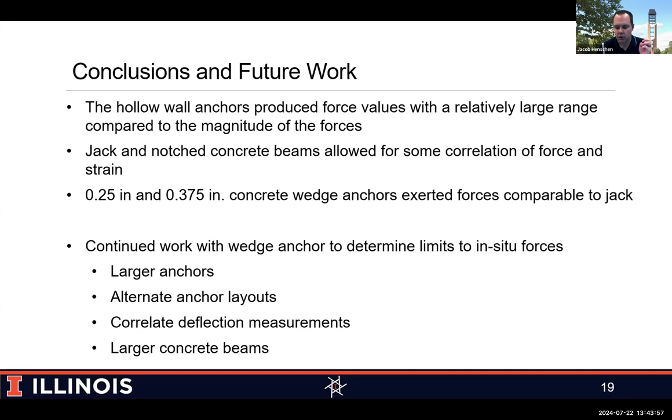And so with that, welcome any questions.